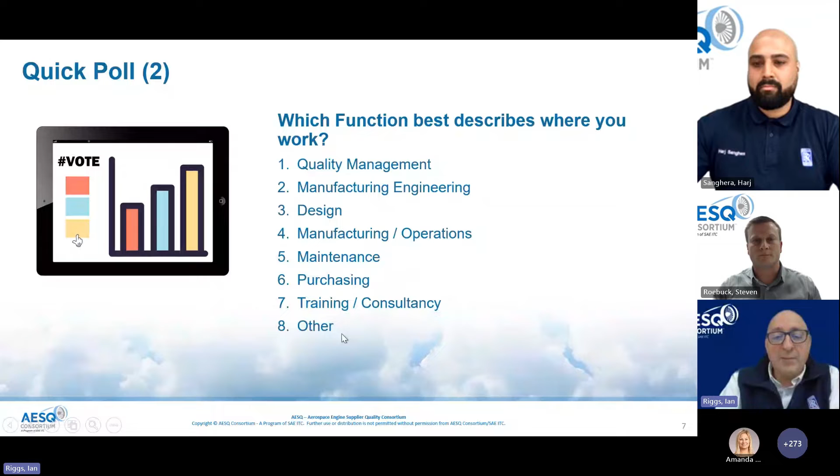Okay, so with that, let's get started. Let me share with you exactly what we're going to cover today. So we're going to start with a short recap on 13004. There are several webinars already on the AESQ website. It gives a general overview of Process FMEA in 13004. This one today is going to really focus on the application in a complex assembly environment.

As you can see from the picture, we make civil large engines in Derby, and working with Harj, we're going to share some of the key insights we've had from applying 13004 in this assembly environment. We're going to try and illustrate that and bring it to life with a practical demonstration. So Harj will lead us through that later on.

And then when it comes to human factors, one of the things we've always had questions about is in a manual assembly environment such as ours, clearly it's quite easy to put down, well, it's the fitter's problem or it's an operator issue. We're going to share something we've looked at from a human factors point of view. And again, we did a webinar, Steve and I, on this last year, but we're going to answer a more specific element of human factors as related to Process FMEA and how we should deal with that, or how we recommend that could be dealt with.

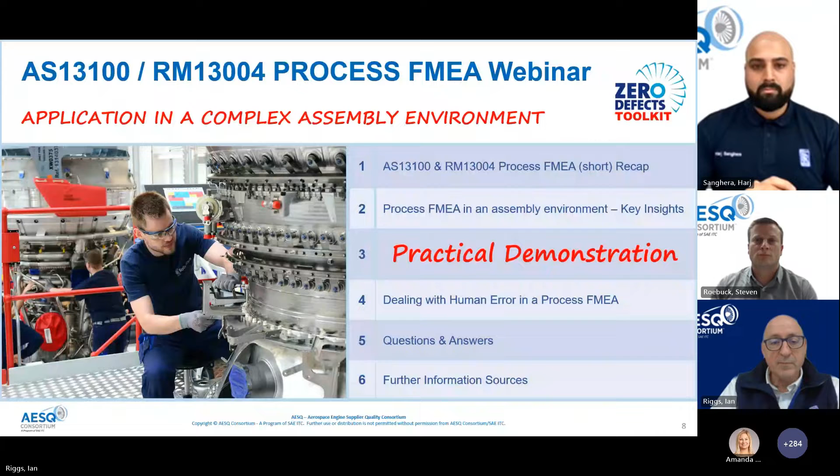So just a reminder, there's two key documents that we are referencing throughout today. One is AS13100. So this was published in 2021 and flowed down by all of the aero engine manufacturers to its supply chain, as well as adopted internally by its own operations as well.

And within that standard, we look at the mandated requirements. So in Chapter C, you will see a lot of defect prevention tools where, in particular, FMEA is called up in one of the appendices. There are some very specific mandated requirements in there.

To support the deployment of those requirements, we've also published a reference manual, 13004, which is available free of charge to download from the AESQ website. And that contains lots of really useful information from all of the aero engine manufacturers and members of the AESQ on how to deploy these effectively within your business.

And just to point out that this was revised at the end of January. So if you downloaded a copy from 2023, there is a revised copy that you can download now since the end of January on the website. And the details are shown on the slide too.

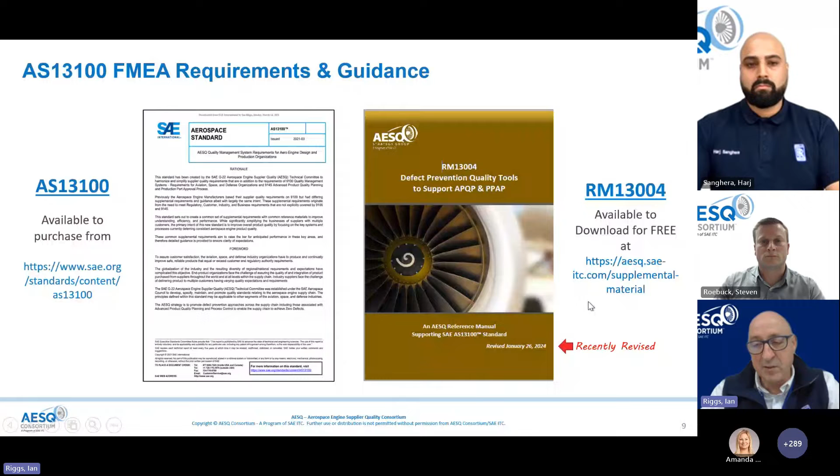Okay, so just to recap on some of the key fundamentals from 13100 and 13004. I'm just going to cover a few key slides to try and summarize why 13004 may be different to how you would have done FMEAs in your company before.

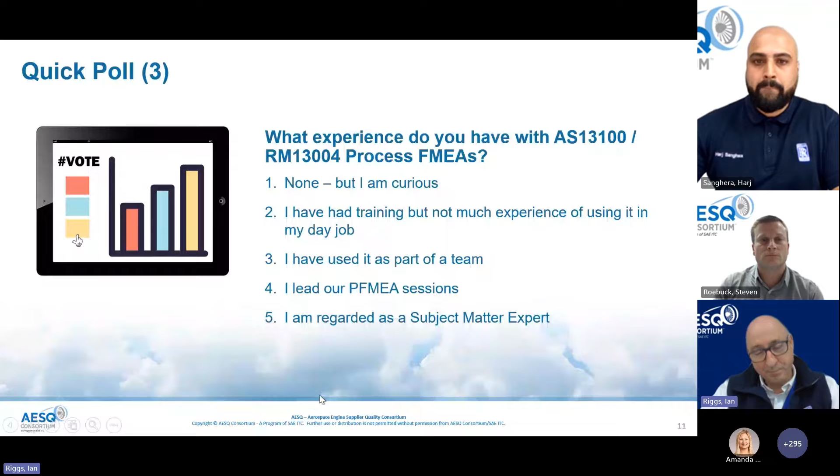Excellent. Okay, so just to kind of calibrate ourselves with what is different about 13004. There's a number of requirements in AS13100. I'm just going to focus on 4 of those, which are really pertinent to today's discussion in the assembly environment. So the first one, it says it must be done by a cross-functional team. And I'm really pleased that on the earlier poll, we've got representatives from all of those functions you'd expect to be involved, whether it's quality, in particular manufacturing, engineering, design, etc.

So one of the things Harj will touch on later is fundamental to the success of this approach, particularly in an assembly environment, is how do you get lots of different voices with lots of different experience and insights into what we're trying to achieve involved in creating the FMEA.

The other one, which although I've done FMEAs in lots of organizations, the one thing that really came home to me in this assembly environment is about making sure the PFMEA is done at the right time in the advanced product quality planning process. Because when I look at a lot of the issues we have today, a lot could have quite simply been resolved if we had designed the part differently at the very start.

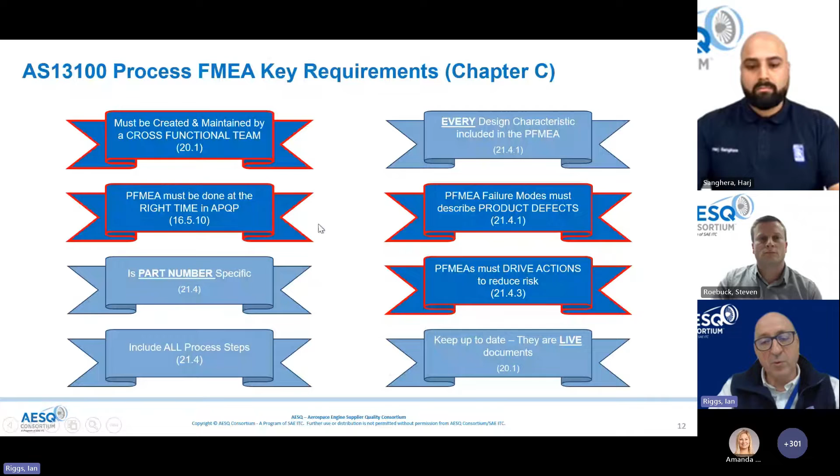So the other key slide that we found useful when we've been training this out is the actual template. And we've divided it up so you can see the bits that are supposed to talk about the product. That's in the purple, sections 1 and 2. The bits that focus on the process, sections 3 and 4. And then the risk and the improvement actions, sections 5 and 6.

So this was a real key learning point, I think, for our manufacturing engineers within Rolls-Royce, is to make sure that when we start off in sections 1 and 2, we're only talking about product requirements, product failure modes, and the effect of that to our customer. So clearly, we're looking at every process step.

As part of our zero defects journey, we used to get questions, well, why are we doing every process step? Why aren't we just doing it on the important process steps? And the answer to that is twofold. One, you will only get the benefit of this defect prevention tool where you apply it. So if you don't apply it to all your processes, you will always get surprises. And that's what we were finding in our analysis. Where we applied it, we weren't getting the escapes and the rework, etc. Where we hadn't applied it, that's where the pop-ups and the surprises kept occurring.

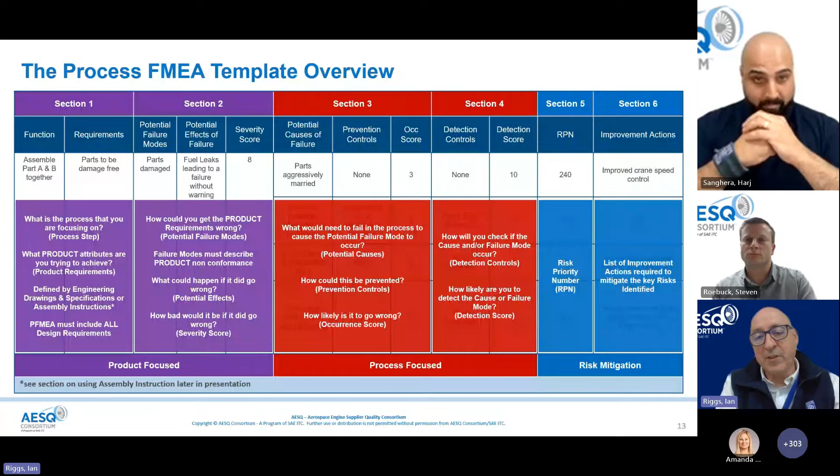But then occurrence score, how likely is that to actually happen? In section 4, you're looking at how are you going to detect if either the cause or the failure mode happen. How will you find that, and how likely are you to find it? And then finally, that will allow you to give you your risk priority number. Using your analysis of the high severities first, and then high severity times occurrence, you can start to prioritize a list of improvement actions that you need to implement.

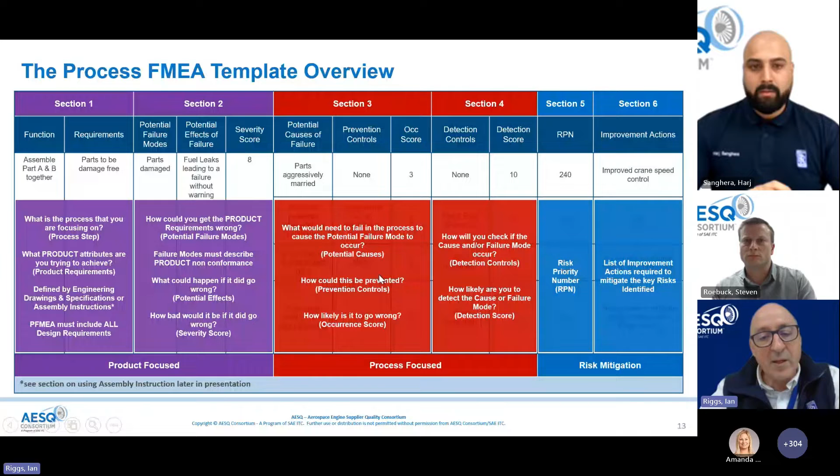So I think it really helped when we started rolling this out, both in Rolls-Royce and across our supply chain, to understand each of these kind of sections on the Process FMEA template. The other thing that seemed to resonate with people is just understanding how the columns link. There is a logic flow that we need to make as we go left to right on here.

What are our prevention controls, and what is our occurrence? But then under detection, we are looking at detection of the failure mode, but also detection of the potential cause happening. That allows us to give us a detection score and calculate the RPN. So one of the things we found is we often had causes that weren't linked to a failure mode, or failure modes that weren't linked to a requirement. So testing the FMEA just to make sure these links are there is really important.

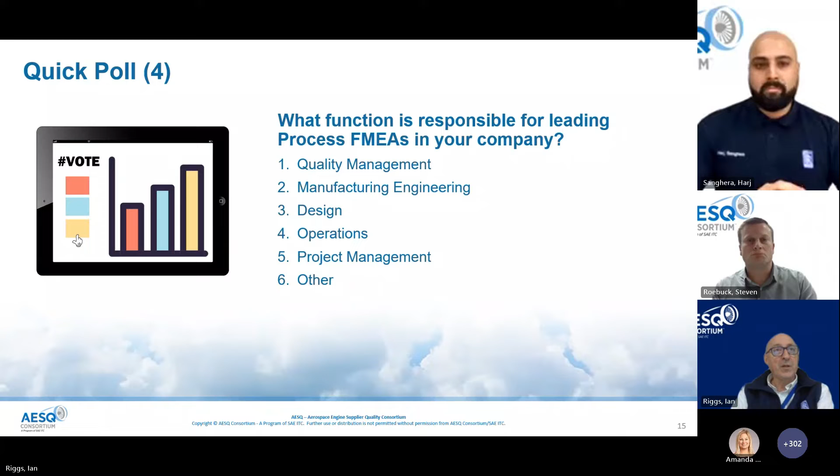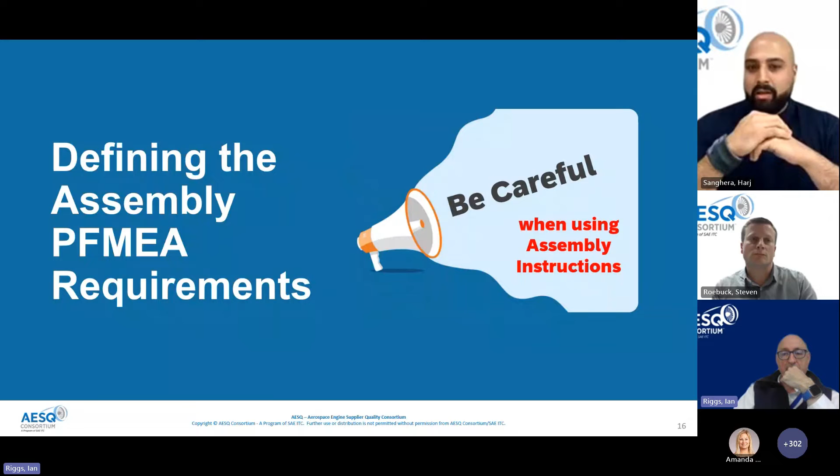The key message here again is to be careful when using assembly instructions to define the assembly PFMEA requirements. If you go to the next slide.

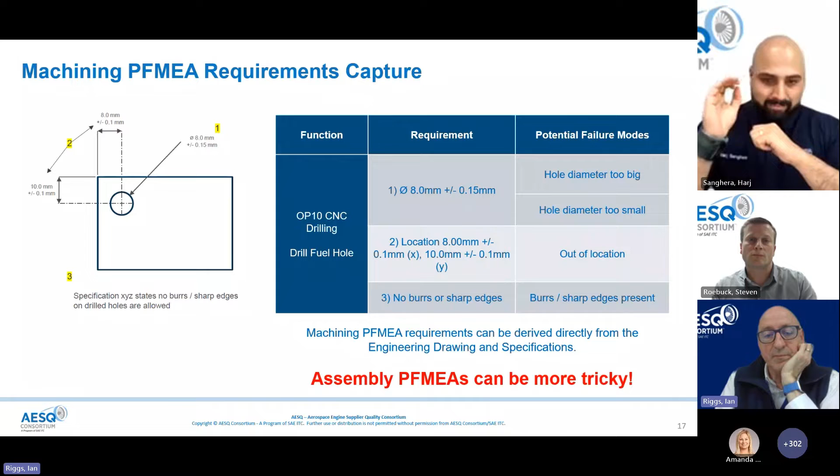This is probably a very basic training example from a machining PFMEA. We use machining PFMEA requirements because they can be derived straight from the engineering drawing and specification. On the left-hand side we see the drawing with dimensions and tolerances, and below it the specification. This flows nicely into the requirements column on the FMEA, giving us the correct potential failure modes. But assembly PFMEAs can be a little trickier.

Here we've got an assembly process with 10 steps. Prior to deploying AS13100, common practice was taking each line of the operation text and putting that into the requirements column. This was not only the incorrect approach, but we ended up with hundreds or thousands of lines of PFMEA lines, and you ended up not getting anything beneficial to your business.

The main point we found was that we weren't conforming to the AS13100 standard, as we were focusing on the process and not the product.

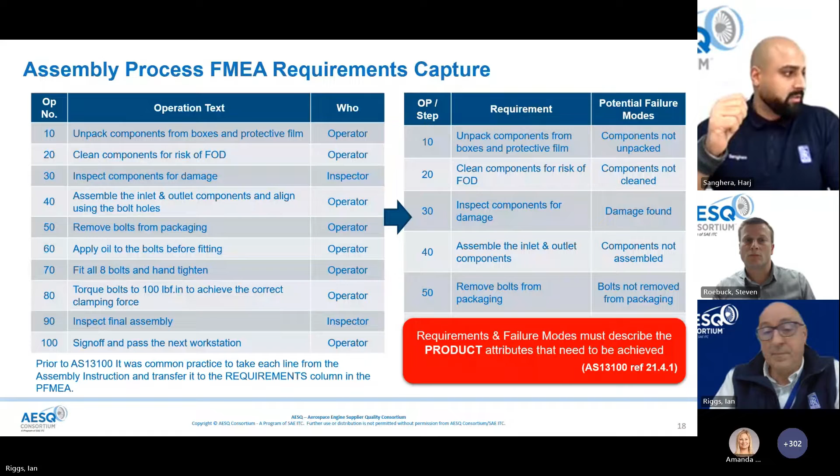So when we actually focus on the product, we can see that only 3 lines are actually applicable. Now, because we focus on the product, we have the correct requirements and the correct potential failure modes. We'll go into more depth on the failure modes during the live demonstration. Focusing on the product can greatly reduce the size of your PFMEA, keeping it more focused on product conformance rather than process.

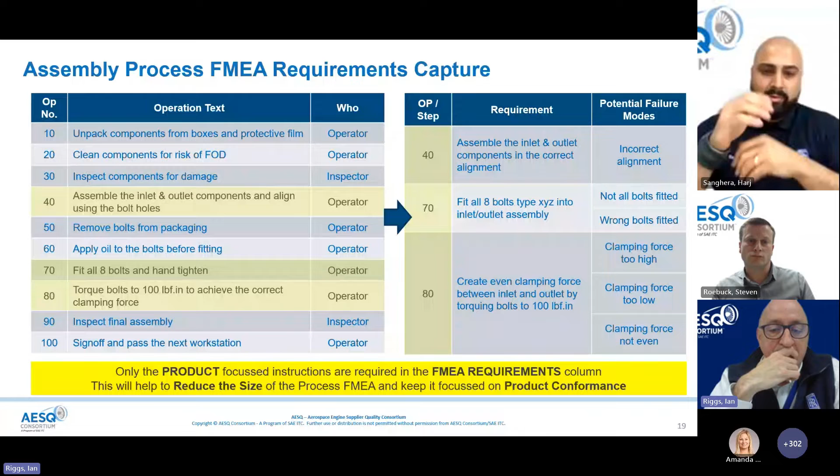So even though we've defined the product requirements from the assembly process instructions, it's not necessarily that the other steps are now redundant. You could use these as a prompt to identify potential causes of failure, and even some prevention and detection controls. We've listed some examples for you to use as a training example.

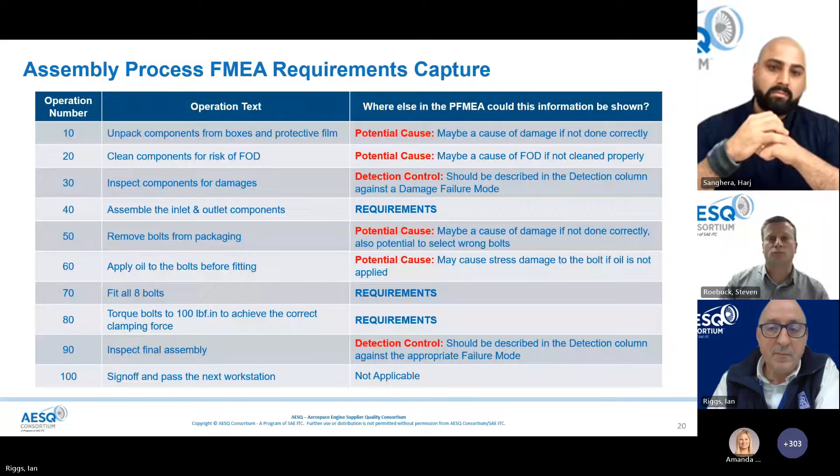One of the other things that really helped, and what we're going to use today as part of the live demonstration, is this: imagine in an environment of aero engines, we've got 30,000 parts, 6,000 operations. It can feel quite overwhelming to think about how you're going to step through such a huge beast and actually do an FMEA.

But what we quickly realized is that when you break it down, when you're trying to fit part A to part B, only so many things can actually go wrong. So in this example, we boiled it down to about 8 standard failure modes that we could use as a prompt when developing the FMEA.

So you've got part not fitted, wrong part fitted, parts misaligned, incorrect orientation. We found that in most of our assembly operations, these could be reused, giving us a structure the team could use to be consistent in how it approached the FMEA. Now, clearly, there are some cases this doesn't capture everything.

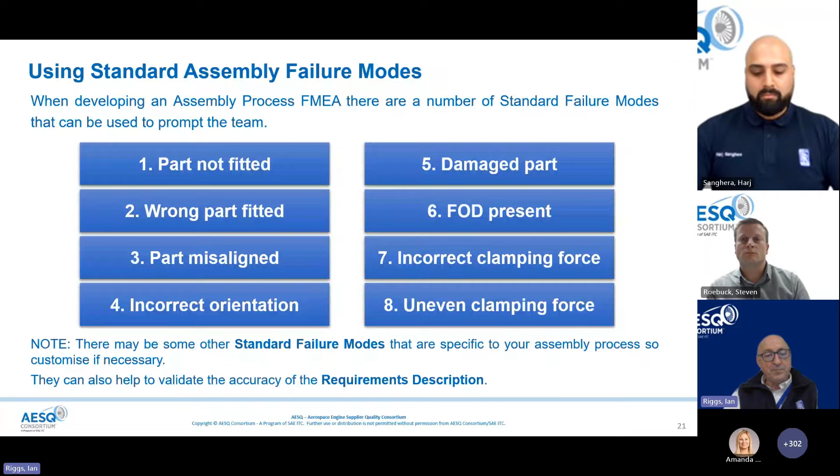For instance, some of our processes involve applying sealant, which would have a different set of standard failure modes. But for this particular example we're showing today, these are the standard failure modes that apply. For most of our processes, when you look at the failure modes that would apply to those operations, I'd say in 80% of cases these will be common. It also helps to validate the requirements description.

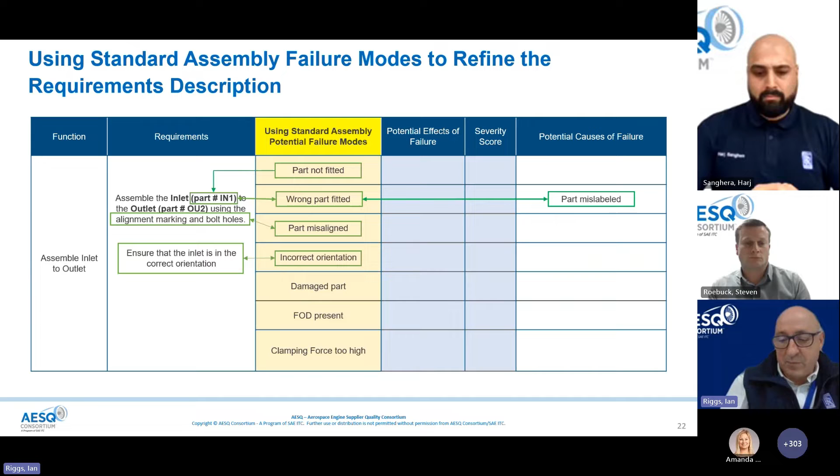But you can see there's some that are not called out on here. What we found was really useful, actually, because we had these standard failure modes, you could say, well, damaged part was one of them. Are we sure that damage isn't important to this operation? And what it had highlighted in a lot of cases was actually, yeah, damage is important to this operation. It's just not included in the requirements. So we've had to go back into the requirement statement and include a requirement around damage or specifications. And two of the key ones for most assembly operations, damage and FOD weren't always included, but damage and FOD was always a potential failure mode that we would worry about.

So by using the standard failure modes, we found there's been quite a few times it will allow us to go back in and refine our requirement statement to make sure it's captured everything we needed to capture. Clearly, there are times when something on a standard failure mode is genuinely not applicable, and therefore you don't need to include that in the FMEA. But it is there as a prompt for the team to say, well, are we sure this doesn't apply? And if it doesn't, don't put it in. But we found that to be really useful in developing the FMEA and making sure it was fully complete and an accurate reflection of what the requirements for that product actually were.

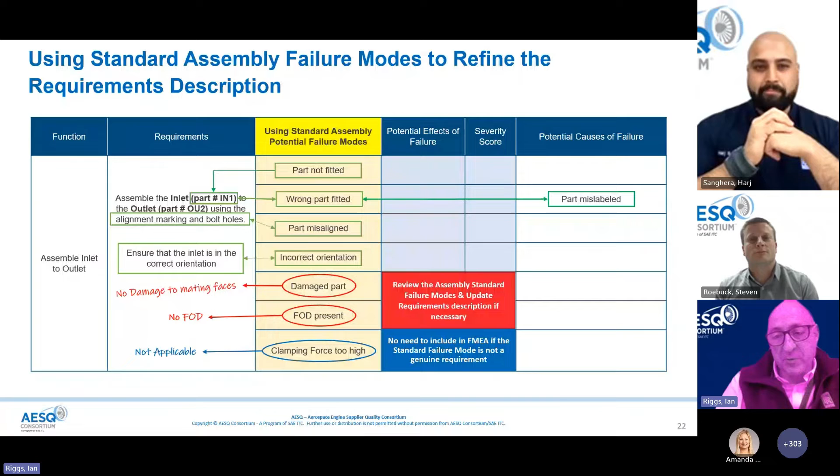Okay, so the next poll is slightly different. It's a bit of a quiz. Just to test out our understanding of 13004, it does kind of lead back to something we have talked about on the call. The question is: which of the following is not a good example of a potential failure mode as defined by 13004? So there is a right and a wrong answer to this.

So Steve, do you want to launch a poll? Just want to check you're feeling okay, because you've gone very purple on the camera. See if you've changed now. Yep, you're better now.

We've got quite a lot of people going for the third answer, torque wrench is out of calibration. Gone down a little bit now, but I'll probably get a bit of a clue there. Let's wait for a few more responses. Is there a clear winner, Steve? The clear winner is torque wrench out of calibration, but we have got a few around the first answer as well, around tooling left in the engine causing FOD. But yeah, torque wrench out of calibration is definitely the top answer.

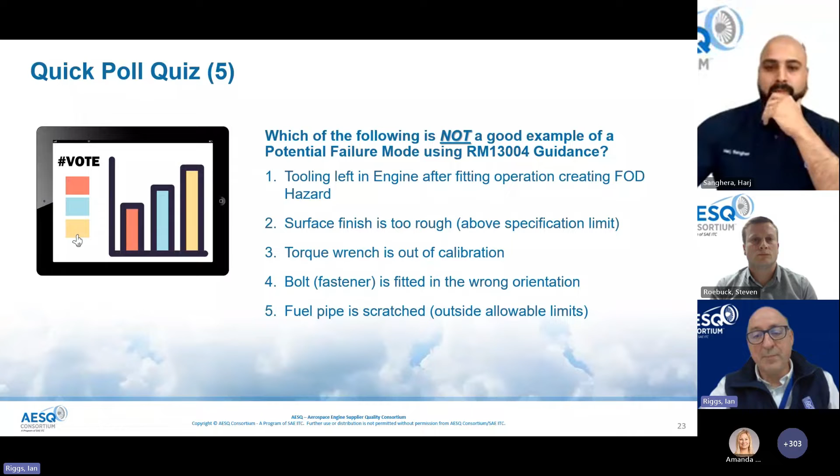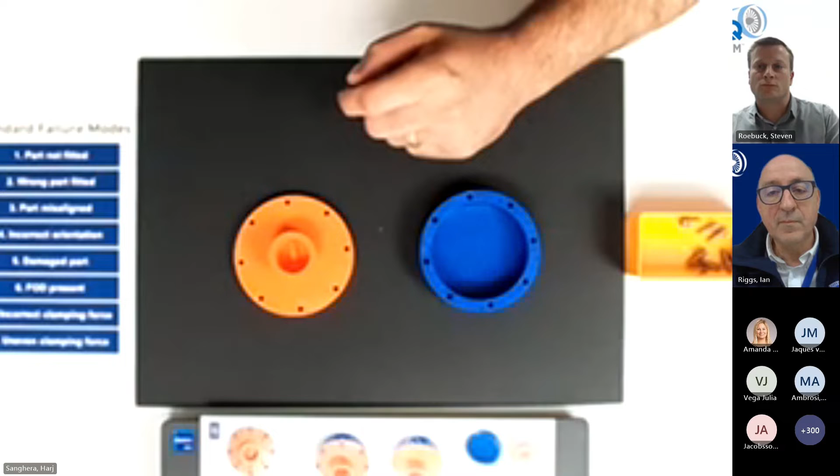So we're going to change gears a little bit now, and head into the practical demonstration of Process FMEA in an assembly environment. So, Harj, we'll give a little bit of insight into what we're going to do for the practical demonstration. We've got an inlet and an outlet. We're going to assemble the inlet and outlet, making sure it's in the correct orientation, with no FOD or damage, and then align the parts using the white mark to make sure the holes align correctly. We're going to fit 8 bolts, torque it to a specified value, and torque it in the sequence shown on the screen. So now we will move on to the live demo. Okay, right.

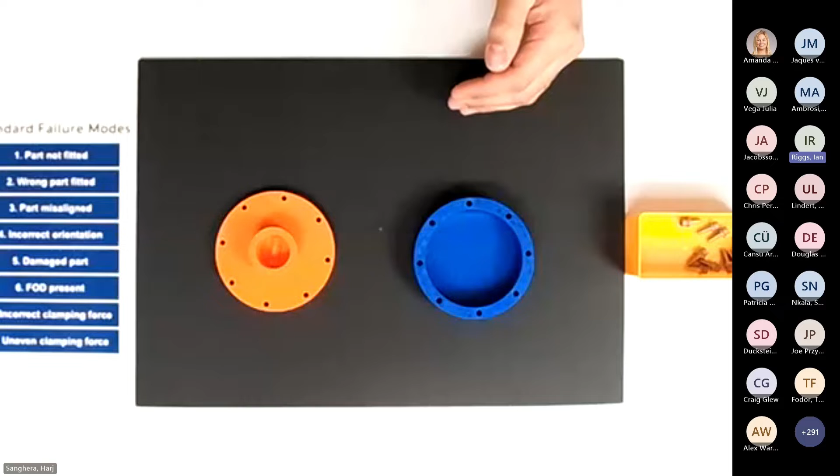So what we're going to do is here, we've got the inlet and we've got the outlet, and we've got 8 bolts here. Using the instructions we have, we're going to assemble the parts, fit 8 bolts and torque them, and we're going to use the standard failure mode list you can see here and work down to show you.

Putting this methodology into practice. The first standard failure mode here is part not fitted. If we would not fit the inlet to the outlet, we can safely say it will be a little bit silly not to fit them. In your business, there's going to be some blatantly obvious items that you physically will be able to detect in your assembly line.

Wrong part fitted. If we look here, we've only got one variation of the inlet and outlet, so this standard failure mode is not applicable.

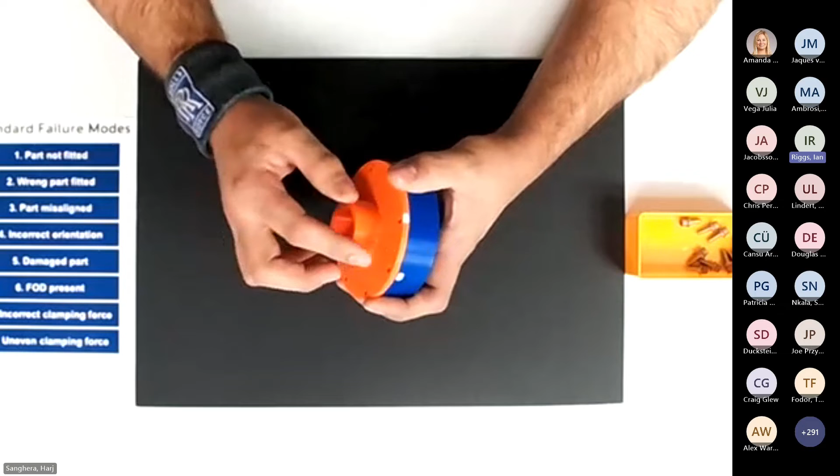Part misaligned. Unfortunately, due to a poor design choice, even though we can align it like this, we can also align it like this, and the bolts will go through each of the holes as shown. So this standard failure mode is applicable.

Incorrect orientation. Again, due to a poor design choice, even though I can orientate it like this, I can also orientate it like this, and unfortunately the bolts will still go through the holes as shown.

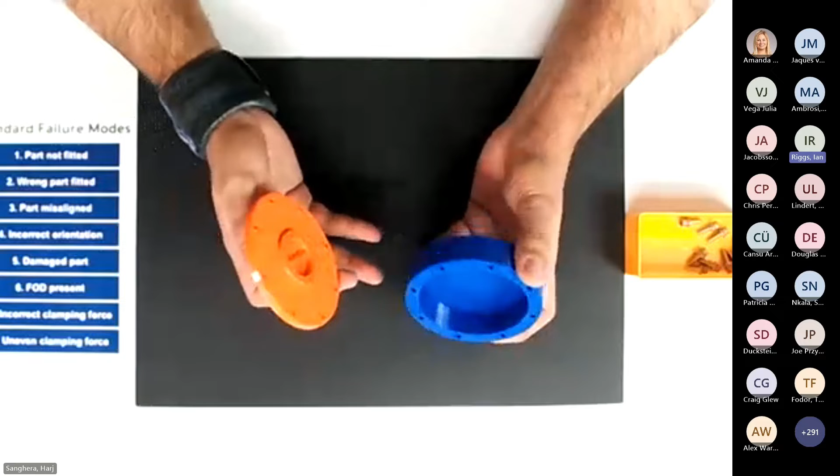Damaged parts - there could be multiple causes of failure for this. We could drop the inlet or outlet onto a hard surface, causing damage to the internal or external surfaces. We could also aggressively assemble these parts together, causing damage to the internal surface of the outlet and inlet. Even when trying to align the white marks together, we could cause damage to the internal surfaces of the outlet and inlet.

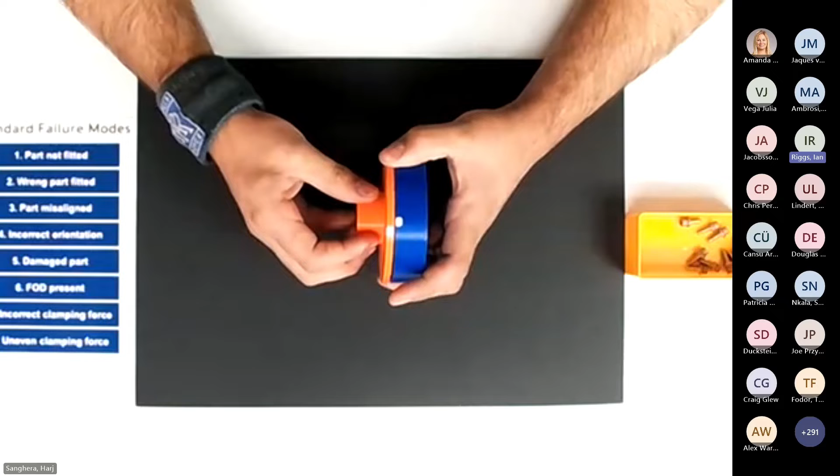FOD present - the area you're working in may not be particularly clean, so FOD could end up on the internal surface of the inlet or outlet. When we put these parts together, the FOD could stop it from being clamped down, or it could even cause damage to the internal and external surfaces. 7 and 8 are not applicable as we're not at the torque stage yet.

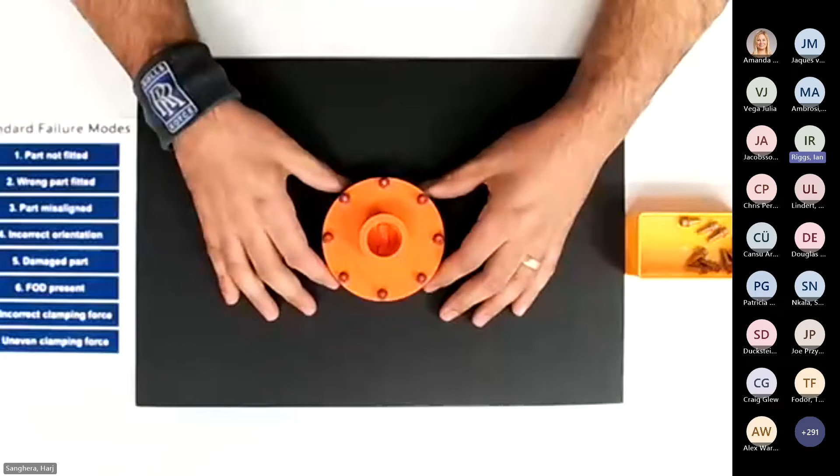So now we're going to fit 8 bolts. Here's an example I did earlier - we fitted 8 bolts, and just so you can see from the misalignment example, we can see that in practice all the bolts are fitted, and we still have that misalignment causing this valve to be misaligned. So now for the bolts, we're going to run through the standard failure modes again.

Part not fitted - it is possible for me not to fit a bolt in this situation. Wrong part fitted - if you look at what I have, I only have one variation of bolts, so we can safely say this failure mode is not applicable.

Part misaligned and incorrect orientation - if you see how the bolts are, you simply cannot get it misaligned as it goes through the inlet and the outlet. And for incorrect orientation, you physically cannot orientate this bolt any other way - I can't go through this way, or I can't go through this way. So 3 and 4 are not applicable.

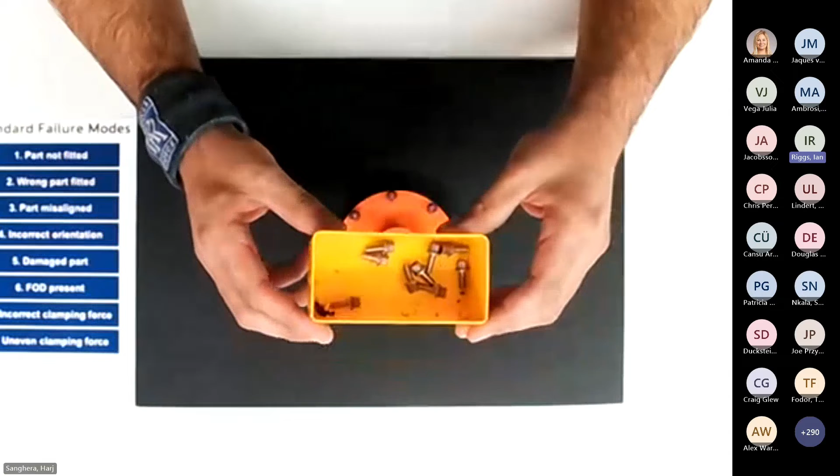Damaged parts - the way these bolts have come, as you can see, they're all together, hitting each other, so we have metal on metal contact. The potential cause of this could be damaged threads from that contact. FOD present - if we look at how the containers actually come, we can see there's a lot of FOD in there that could get trapped in the threads and cause damage further down the line. Again, 7 and 8 are not applicable as we're not at the torque stage yet.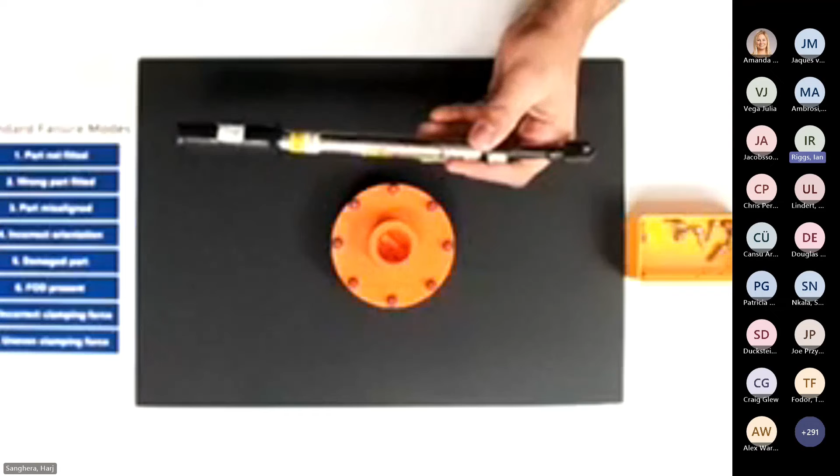Right, so let's torque these bolts up. Here I have a standard torque wrench, and the only failure modes applicable for this would be damaged part, incorrect clamping force, and uneven clamping force.

Damaged part - a potential cause could be using the incorrect socket head, which could cause damage to the bolt, or I could even cause damage to the part as it could hit the inlet tube.

Incorrect clamping force - even though I have a specified value in the instruction, I have the freedom to change this to whatever I want, so I could change it to too high or too low with minimal detection.

And uneven clamping force - even though the instructions showed we were supposed to go this way, it doesn't really matter. I could go any particular way I want, and it could cause an uneven clamping force with minimal detection. So that's the first scenario.

As we know, a lot of businesses don't operate with a single assembly product. So let's add a little bit more complexity to this now. So here we have the original inlet and outlet, and now we've got a different part with a range of bolts. So again, what we're going to do is run through the standard failure modes and see which ones are applicable now. So again, part not fitted is the same as scenario 1, where it would be a bit silly if we didn't fit the inlet to the outlet.

So let's move on to the bolts. So move these out of the way. So here I have the original one with all the bolts fitted. So again, part not fitted is still applicable, as I could potentially not fit a bolt. However, wrong part fitted now, because I have a range of bolts available on the line, and they all have the same diameter, I physically can fit a different bolt.

So here we have an example of a bolt too long, and as you can see, this could potentially get detected because we can visually see the gap. However, in more of a dangerous circumstance, here we have a bolt too short. Now, this bolt can go through the inlet and lock on to the outlet's captive nut.

But the issue here is that these can still be torqued up, and potentially over time they could vibrate out, causing catastrophic failure. And again, the other standard failure modes are still the same and applicable as they were on scenario 1 and even the torque example. So what we're going to do now is we're going to implement some improvements.

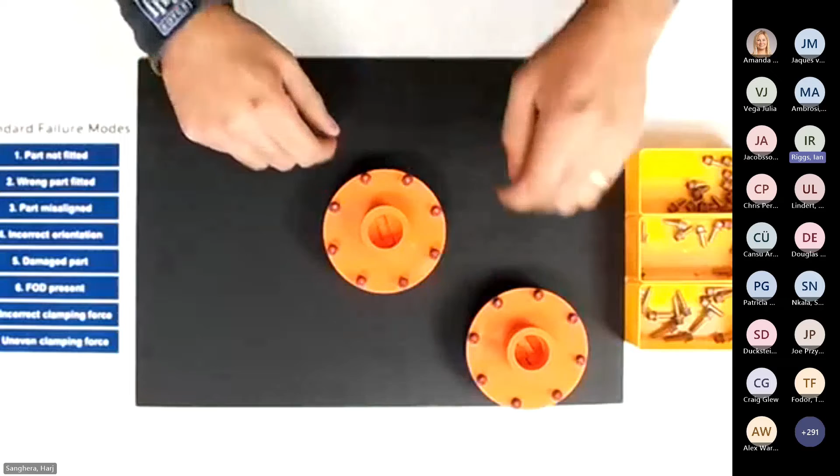So we've gone back to the drawing board, and here we have a new inlet and outlet, and we're going to improve our packaging system now. So now, totally different scenario. So let's run through the standard failure modes again and see which ones are applicable. So just as scenario 1 and 2, part not fitted is still the same, so we can rule this out as not applicable.

Wrong part fitted, so we've segregated the line now where only the specific parts will come to the line. So now this standard failure mode is not applicable. So part misaligned, thanks to some error proofing, now we can only align this one way. So if we were to align this way, due to an offset bolt position, if we were to put the bolt through here, we physically cannot fit the bolt anywhere else as they would stand proud.

So now the only way possible is to align it like this. So we've error proofed that. So now this standard failure mode is not applicable. Incorrect orientation. So again, here, what we've done is we've increased the diameter and increased the length of the inlet tube. So the only way we can orientate it now is like this, because if we orientate it the other way, as you can see, we physically can't. So 3 and 4 are now not applicable in this scenario.

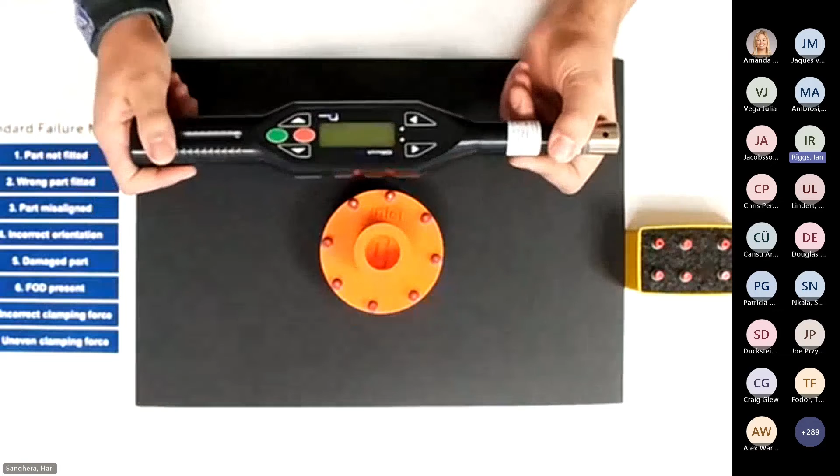And now moving on to the torque part. So originally we had a normal torque wrench. Now what we've done is introduced an intelligent torque system. So for incorrect clamping force, what I have now is a program-controlled torque wrench where I physically cannot change or adjust the torque value, as it's programmed specifically to this. So now this standard failure mode is not applicable.

And again, uneven clamping force. So even though this torque wrench does still allow me to work out of sequence, some improvements and solutions that are out there are proximity torque wrenches, where it won't allow you to move out of sequence, or we could potentially have a tool that comes down and torques all these bolts up at the same time to give that correct even clamping force.

So that was a live demonstration. We hope you found it helpful, and now we will continue with the rest of the presentation.

So Ian. Okay, thanks Harj. No problem. Thought there might be a few more reactions there, Harj, but yeah, well done on that one, mate. Okay, so let's go back to this.

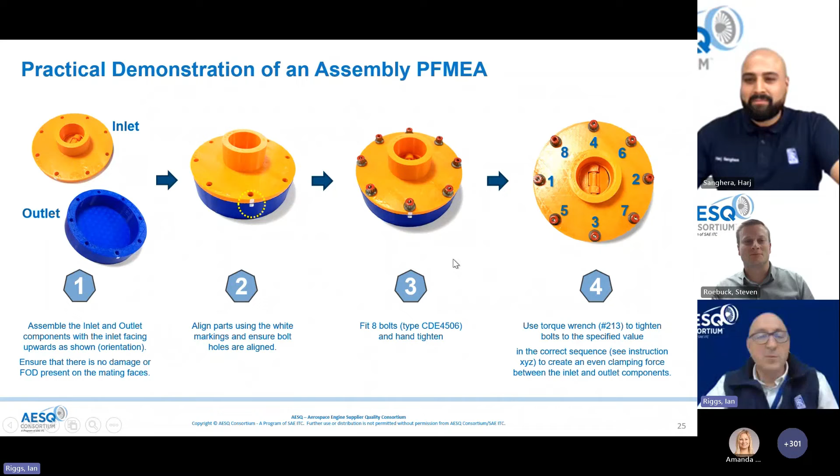Is that sharing? Yeah. Okay, so if you want to just recap what you've gone through in the demonstration, Harj. Yeah, so again, just going through the standard failure modes that we spoke about. Here we've got a couple of illustrations as well, just to help you out. So going through the first one again, part not fitted. We used the example of missing a bolt out. Wrong part fitted, so when we had two variations of the inlet, it could possibly happen.

Part misaligned, so due to the poor design on the first one, we could misalign the white marks, and all the bolts could still be put through. Incorrect orientation, so like we discussed, we could orientate it one way, but it would fit the other way. Damaged part, so here we have the example where the valves actually come out, but we discussed examples of dropping the part or aggressively assembling them together and scratching the internal surfaces.

And again, FOD, we spoke about a potential environment not being clean. So here we have an example where FOD could creep up, causing that damage. And incorrect clamping force, where we could set it too high or too low. The image we've shown there is if we do set it too high, we could crack the inlet. And again, uneven clamping force. If we don't follow that sequence, we could end up with one area higher than the other.

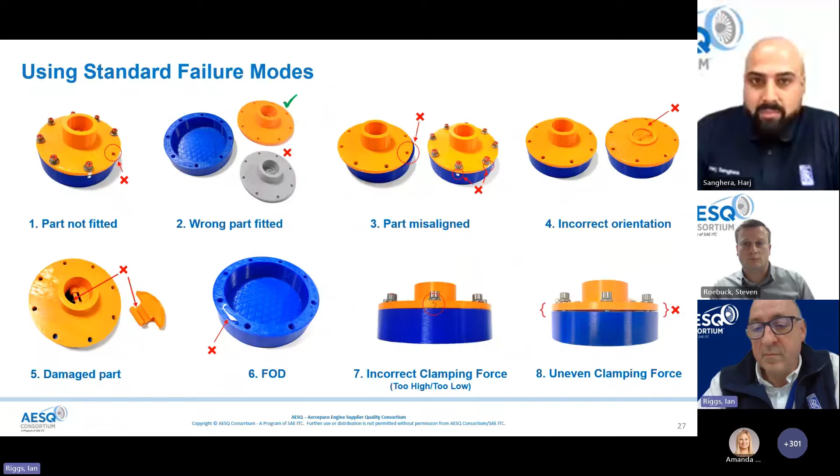And then just touching on some of the improvements that we did, if you remember. So for the orientation, we increased the diameter and the length. So effectively, we cannot orientate it in any other way. And with the alignment, as you can see from this demonstration now, if we were to not align the white marks together, we physically cannot put the bolts in because of that offset hole. And I think it's worth mentioning here that error proofing of parts must be done in the design phase. And in APQP, the PFMEA starts at the design concept so we can influence the design process.

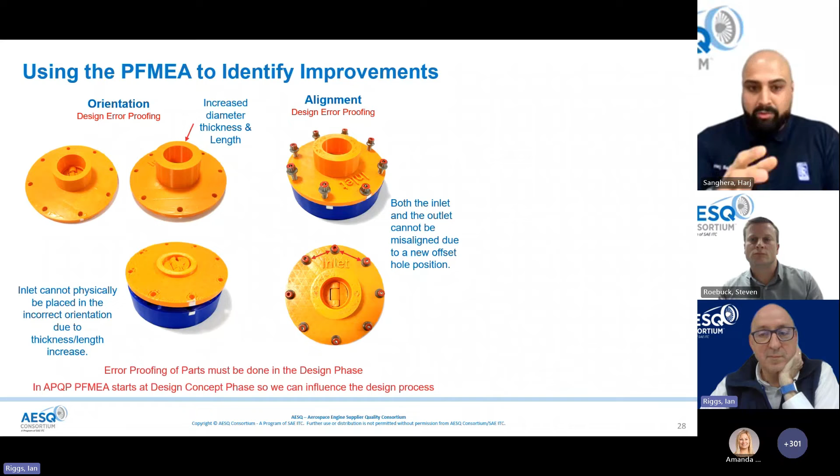So other things that we did as well, we introduced some kitting, and we also reduced the risk of our C-class parts. So we removed all the parts that are not applicable to that product, and we introduced some new packaging to protect the bolts.

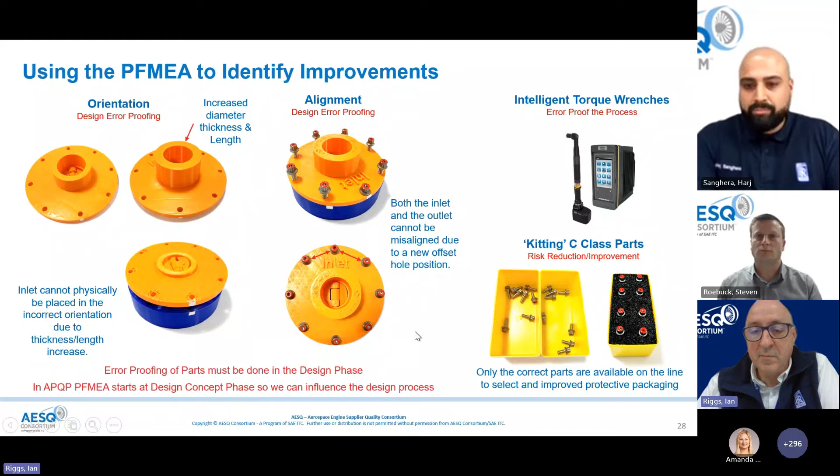Thank you. Okay, thanks, Harj. So one of the things, just to show how it would look using the standard FMEA template. If you take the requirement that Harj took us through, clamping force is one of the failure modes that we have. So in this case, we'll pick on clamping force too low.

Now, if the clamping force was too low, our design engineers have informed us that could lead to excessive vibration in service, which may result in a loss of thrust and consequently an in-flight shutdown. So that is quite severe. They've scored it on a severity level as an 8. So having the clamping force too low is a significant thing that we need to focus on.

So what could cause the clamping force to be too low? The team have decided you could have it under-torqued, so we haven't torqued the bolts enough, or indeed we haven't actually torqued it, so they've been fitted hand tight but haven't been torqued to the full value. The other one they've identified is that you could have an undersized bolt fitted. So in this case, imagine it's too thin.

So it's actually been fitted, it's holding, but under pressure that could easily fail. Now, when we looked at prevention for the under-torqued and not torqued, we've said, well, if we use intelligent torque tightening, that system will tell us and look for confirmation that we've actually done every bolt to the right value. So you can't not torque it because it won't allow you to progress to the next operation. You can't under-torque it because it's set and defined by the system.

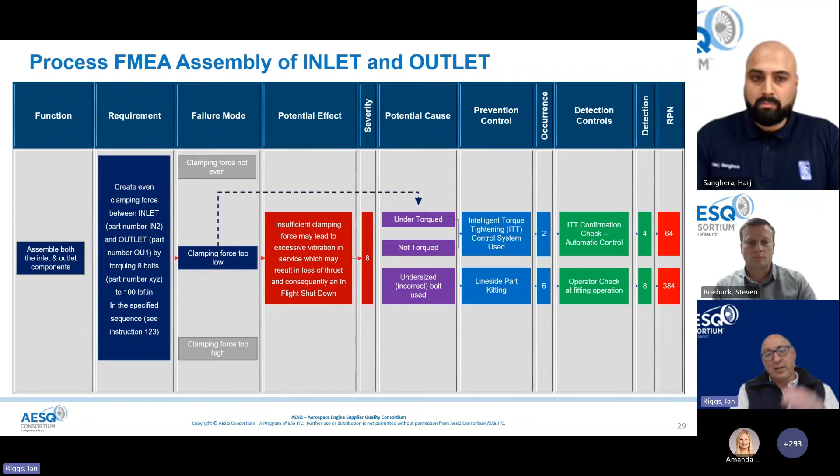So that just goes to show, from the example that Harj talked us through, that's how you would bring it down into the FMEA format of the template, and where you apply mistake proofing, you will end up with a lower RPN. Where you don't, you'll end up with a higher RPN. And again, there's a logic flow left to right as you go through the template.

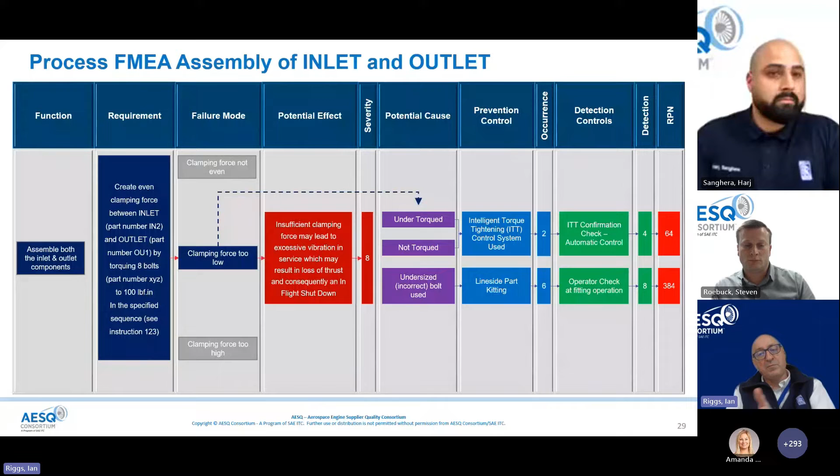So now I'm going to hand over to Steve, and Steve's going to take us through how we manage human error within an assembly PFMEA, bearing in mind that our operations are very manually intensive and reliant very much on people. Steve? Yeah, thanks, Ian. And like Ian mentioned earlier, we did do a webinar topic on this last year, which goes into a bit more detail, but we just wanted to cover the key points, linking it to an assembly PFMEA.

Again, like we've already mentioned, from an aero assembly operation perspective, we're putting together and inspecting 30,000 components in around 6,000 manual operations. So there's a lot of opportunity for errors, and human factors therefore plays a critical part in assuring we get the right product quality and product safety. That's why, from a human factors point of view, we've looked at risks from a PFMEA perspective and how we can help reduce those risks as we do the assembly operations.

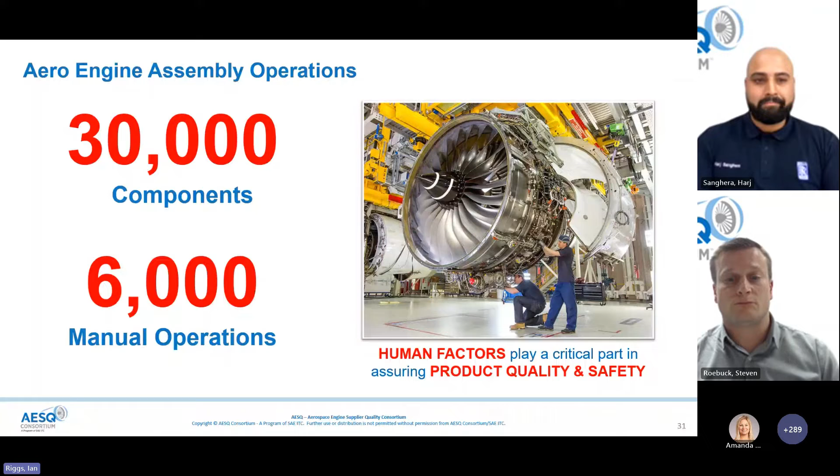So within Rolls-Royce, we use the dirty dozen, which are the 12 most common causes of human error. And hopefully some of you on the call are aware of the dirty dozen and human factors. And obviously, it's part of the AS13100 standard as well.

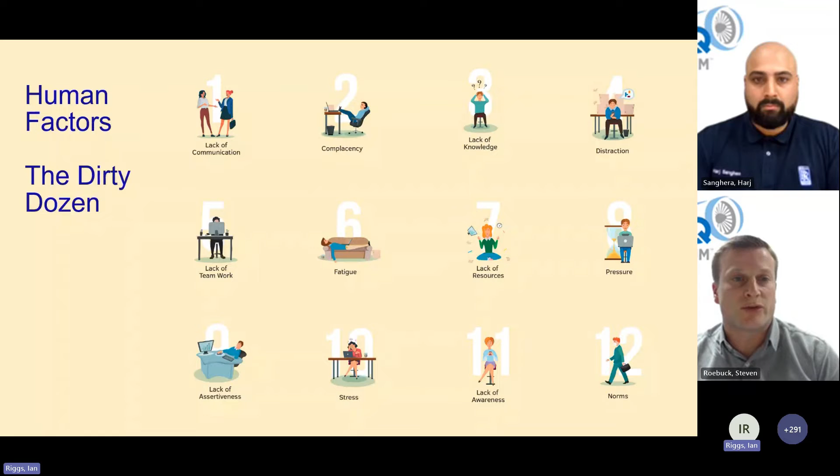What I want to do now is just talk a bit about distractions, and we'll move on to the next poll. What we found when we were looking at the human factors and the risks around our operations and inspection activity, distractions was a big cause of errors and obviously a big risk to us. So we wanted to do a bit of a poll on that. If you think about distractions in your workplace, what do you think the biggest cause of distraction is in your area? A few examples there that we've pulled out. Just launched the poll.

As you can see, there's quite a lot of different things that could cause a distraction. Just be interested to see what people think around that.

Looks like we've got quite a high percentage on just talking with co-workers can be a distraction. If you're doing a critical operation or a piece of work and somebody interrupts you, that can stop you in your flow and that can cause a distraction. Using personal telephones, again, looks like it's quite high. Interruptions by management or supervisor, that's around 12% at the minute. Poor part quality, too much paperwork, again, those can be quality issues that cause you to stop, which causes a distraction.

So yeah, and that's fairly consistent with what we've seen as well, Steve, isn't it, from the work we've done on the shop floor? Yeah, definitely. And again, it's very difficult to reduce distractions to zero, but there are things you can put in place to reduce it as low as practical, really.

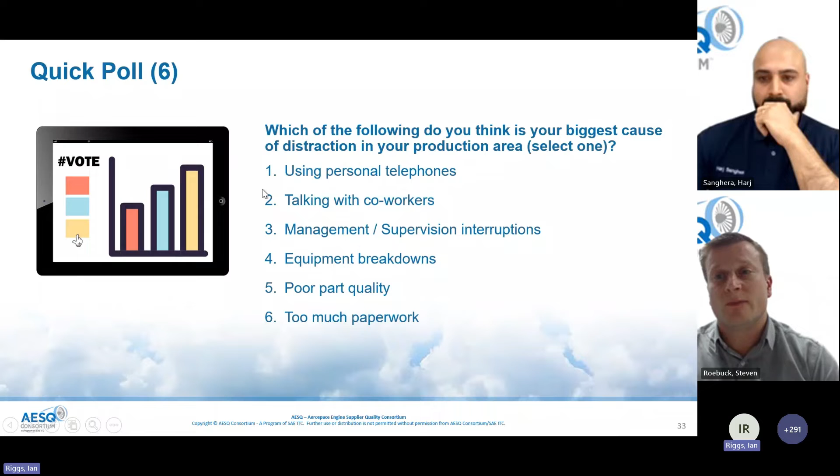So one of the frequently asked questions we had on a previous webinar was, why don't you have the human factors FMEA into the part-specific process FMEA as per the RM13004? So I just want to touch on that in a couple of slides to try and bring that to life.

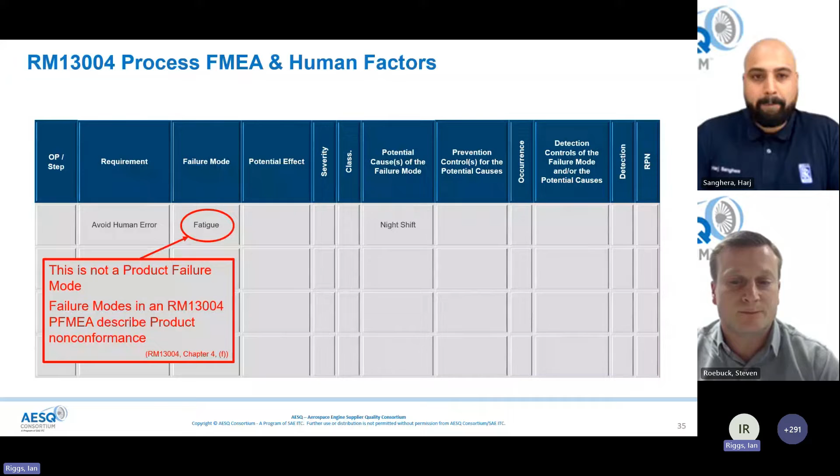The second example is just to try and bring to life where we've used a human factor as a potential cause of the failure mode. So the failure mode is the parts fitted in the incorrect orientation, and then the potential cause is a distraction. So what we must try and avoid is obviously simple operator error as a potential cause. If we removed the distraction, could we still fit the part in the incorrect orientation? That's what we need to ask ourselves. Is there a cause and effect relationship?

And I guess, Steve, it's putting it the other way around too. That cause and effect relationship. If an operator was distracted, would he fit the part in the incorrect orientation? Yeah. That link is quite weak. So, as Steve said, if this cause was to happen, you would want a much more direct link. If this happened in the process, this is what would happen in the product, and that link is very weak using it in this way.

Yeah, definitely. So obviously human factors aren't related to specific part non-conformance. So the way we've done it is look more at the working environment and looked at those human factors from a process or environment point of view, from a manufacturing or an inspection area. So we've taken a slightly different approach and taken those human factors risks out of the process FMEA.

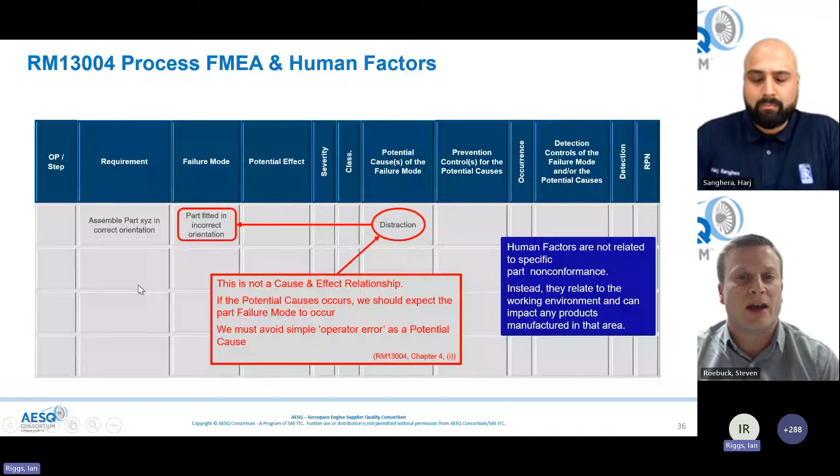So some of the key insights really, we believe putting human factors risks into the product FMEA can create too much noise, a bit like Harj mentioned earlier around the old way of doing FMEA, using every single process step. It can create a really big document and a really big FMEA. So we decided to do a separate human factor FMEA approach, and just do a high level analysis of each process or environment in a certain area.

So we've rolled that out across the assembly and test operations. We've done assembly operations, inspection operations, test operations, and transactional operations as well. So we've done a range of different processes. In the human factors FMEA, we use the dirty dozen as the failure mode, because obviously we're not doing a product FMEA. And you'll see examples on the AESQ website and in the guidance material, an example of the human factors FMEA that we've shared with the AESQ.

The interesting point is when we go into different areas, each area will have a unique signature based on its environment. And obviously that can change over time, so it's important we revisit these FMEAs because things do change. You might have new people coming into an area, you might have a ramp up in workload, so there might be more pressure. We could have a number of quality issues in the area which might lead to a distraction, for example. So these human factor issues can change on a regular basis, so it's important we keep them updated on a regular basis.

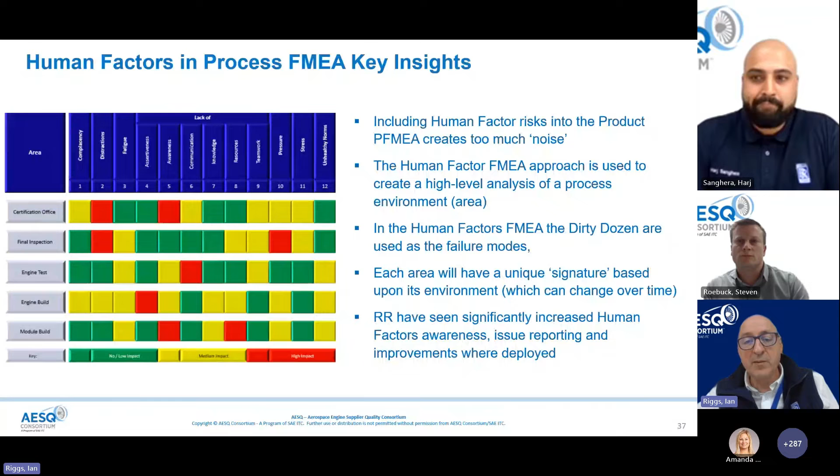Okay, so we're going to continue, and I'm going to hand back to Harj to give us a summary of those key assembly insights.

So there are 4 things we want you to take away when implementing the RM13004 assembly PFMEA. As we discussed before, the requirements have to describe the physical product outcome of what you want to achieve. Like we showed previously, where we had the assembly instruction, we only showed the product-related descriptions in that instruction. This will greatly reduce your PFMEAs from thousands down to hundreds of lines, so you're keeping it product focused.

Failure mode must describe a physical property of the product, and these are derived from the requirements description. Like we showed in the live demonstration, as Ian discussed, use the standard failure mode checklist. There will be other failure modes incorporated, but this is just a good starting point for you to use.

And for potential causes of failure, try to avoid completely vague ones like operator error. As Steve discussed, use the human factors PFMEA approach if you feel this is a problem.

The biggest one for me is potential causes of failure. As an ME, I sit on the shop floor with the fitters, and it has a vast amount of benefits from doing this. Not only does it build a great relationship with the fitters and get you well acquainted with your product, it also helps keep the PFMEA alive and strengthens your potential causes of failure because you're actually going to the people who do the job. So it's good to capture their insights and take on board their suggested improvements.

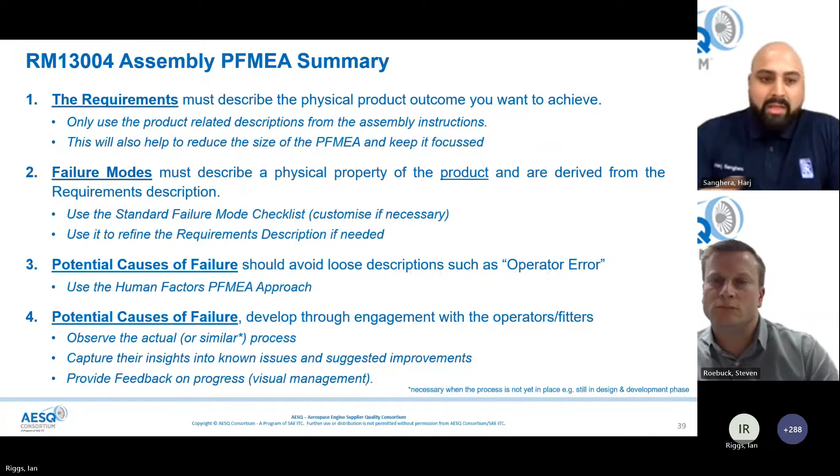Here we've got some examples of that practice in place. So again, you see myself going up to the fitters, having my standard failure mode, speaking with them, getting their insight, and really strengthening up those causes of failure.

On the right hand side, in each area we have an action tracker. On a daily basis, we have all the PFMEA recommended actions on this board along with improvements. We have a cross-functional team that comes from different areas, and we strive to drive down high RPNs and implement those improvements. The reason we do it on the shop floor is, one, I deem it better because we're next to the fitters, and we can pull the fitters in when required so they can give their feedback. We feel this approach really works, and we've been seeing some great results from doing this.

So again, it's just a little example of how you can extend the PFMEA approach by burning down those high RPNs. So thank you very much.

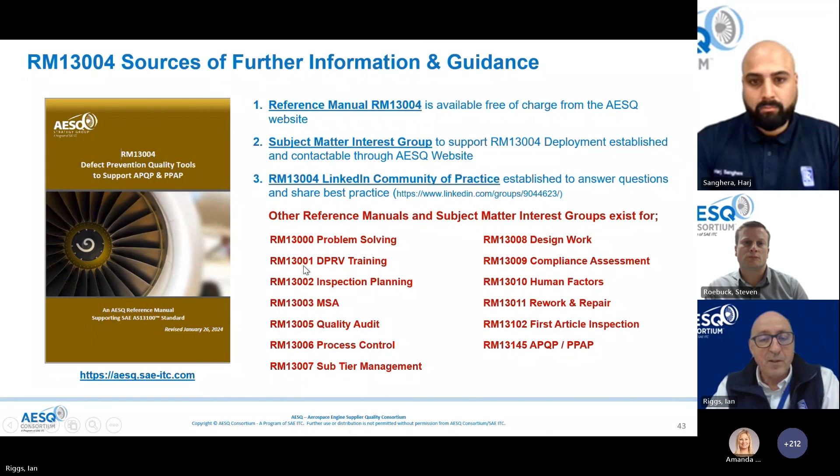Next, I wanted to remind everybody that if you go on the AESQ website, and I've included the link in the QR code, there are six related webinars recorded there that you can download and watch for free. For many of them, the presentation slides are also available on the website for you to download. There are ones on a broad overview of Process FMEA, control plans, design FMEAs, and human factor FMEAs as well. Those are all there for anybody to download, free of charge.

There is one in planning that we're hoping will be scheduled by around April time, around FMEA software and user insights. We have Ebru from MTU and Jonas from Rolls-Royce currently preparing examples of the types of software we use in our own companies. As Harj says, we use XFMEA in Rolls-Royce, while MTU use a different integrated software. They are going to share their experience with those software. If you have any particular questions around that, you can contact through the community of practice on LinkedIn so they can take account of that when developing the webinar.

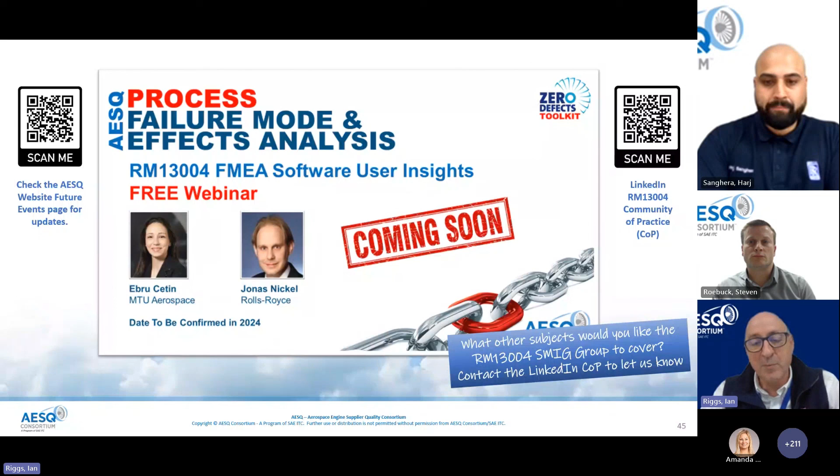On the left-hand side of the AESQ website, there is an events page which shows what's planned, the dates, and gives you links so you can register. It's worth keeping an eye on that because there's a number of webinars planned for this year, which is on my final slide. This is what the events page looks like at the moment.

You can see there's a number of things here. In particular, the process control subject matter interest group has almost every month a different topic around process control that they're running a webinar on. It really is a great resource. They're all free, and they support the deployment of 13100 and the relevant reference manual. So you will undoubtedly see things that in the future may be of interest.

There's also things listed here like supplier forums, where you can actually go meet the team. You can see a picture along the top of that header - that's from a supplier forum we did in Toulouse back in 2019. It's a great opportunity to go meet the people who are writing the standards or the reference manual and get involved and give your feedback.

The supplier forums are free and they rotate every quarter. There's one in Tokyo coming up in April, then one in Sweden in Trollhättan for June. So keep an eye on those.

The AESQ do an absolutely fantastic job, I think, of making information available and giving all companies access to the people who are defining the standards or deploying them through their organizations to their supply chain.